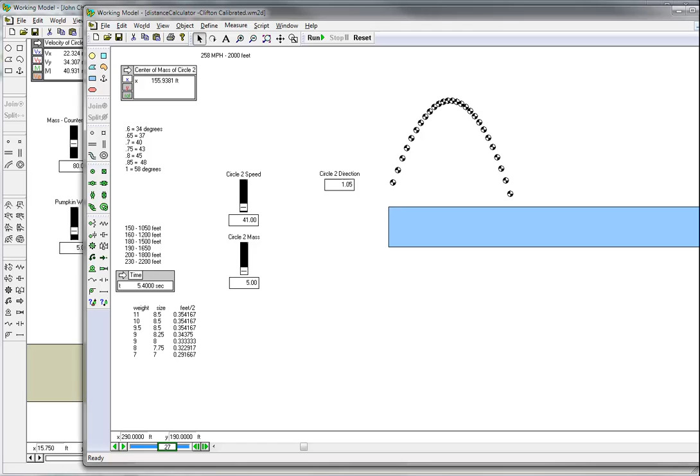whoops, let me do a reset and clear and do a run. Okay, that's about 156 feet. So that's what I'm optimized to. Now the only change I'm going to make here is, let me reset it and clear it. I'm going to change the weight of the pumpkin down to 4 pounds. Okay, and let's go ahead and rerun, all the rest being equal.

And if I let that thing go, notice the fact that the angle is quite a bit less, and the pumpkin is going quite a bit faster. We're up to 47 miles an hour, so 48 miles an hour. Let me calculate that. Okay, if I go back here, the angle of this thing going out is around 50 degrees or so, and that translates to 0.87 radians.

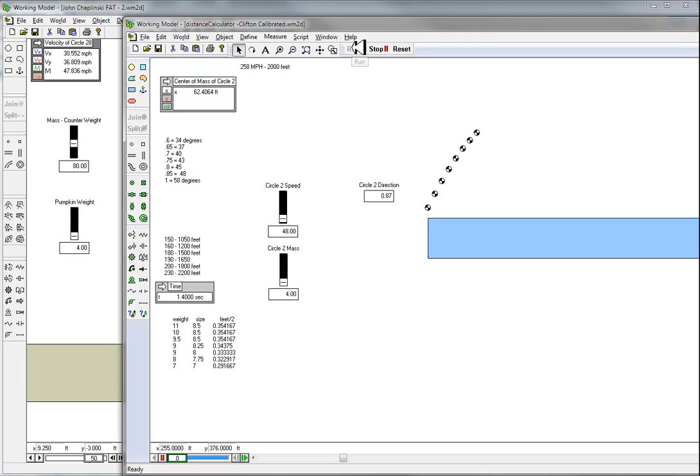And I put the speed in there. 47 really should be about 48. The mass of the pumpkin, that goes back down to 4. Oh, it won't let me do that. Let me change that. Okay, that's changed. And let me go ahead and do that run. And if you'll notice, it's considerably flatter than we saw before, and it goes out 240 feet. So there's a sizable difference between a 5 and a 4 pound pumpkin.

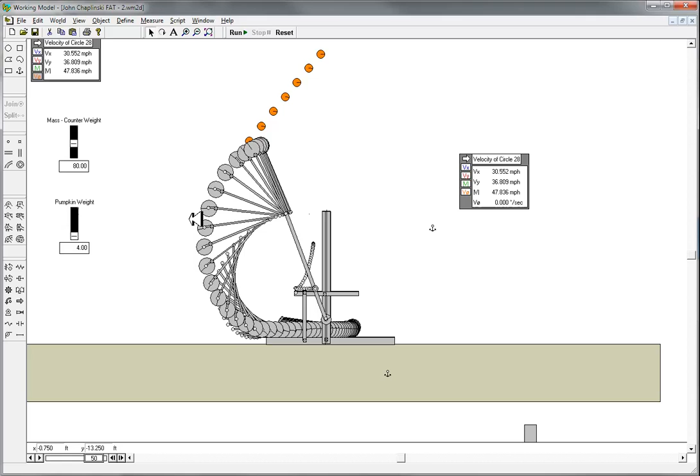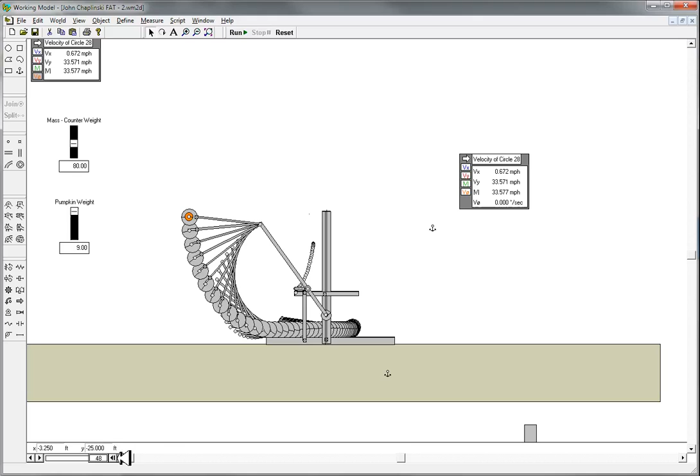Now let's do the same thing with the 9 pound pumpkin. This is when things start getting pretty dramatic. I'll change that to 9, and let's go ahead and run it. Notice the fact that I stalled very early. Oh, by the way, the release of the pumpkin is being based on the angle between the sling and the actual throwing arm. And that's why it's remaining constant.

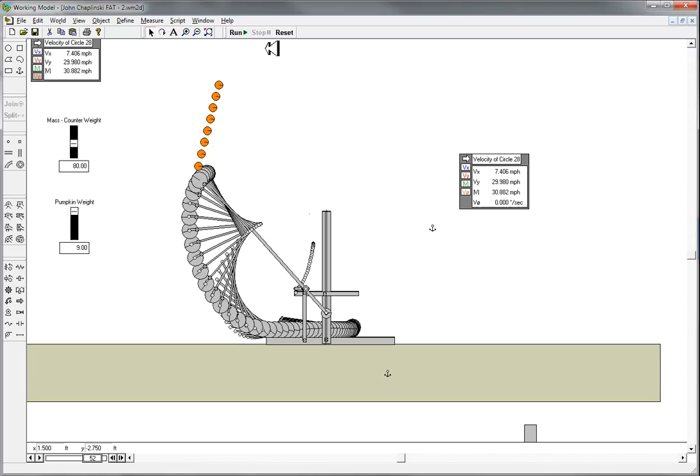And if you'll notice, we actually pulled that thing backwards with that pumpkin, and it's going pretty high. As a matter of fact, dangerously close. If I take these numbers and I put them in, let's see, the speed of the pumpkin is down to 30 miles an hour. Our mass is now 9 pounds.

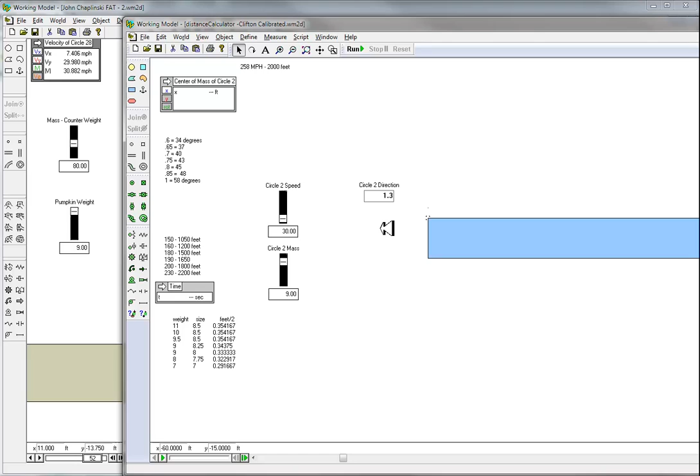And the direction of the pumpkin was actually about 65, or no, 75 degrees. So that's 1.31 radians. Let's go ahead and run that. And notice that thing is taken up pretty high. Okay, and I have a distance of probably about 53 feet. This is getting pretty dangerous because it's so close. We'll follow up with this later.